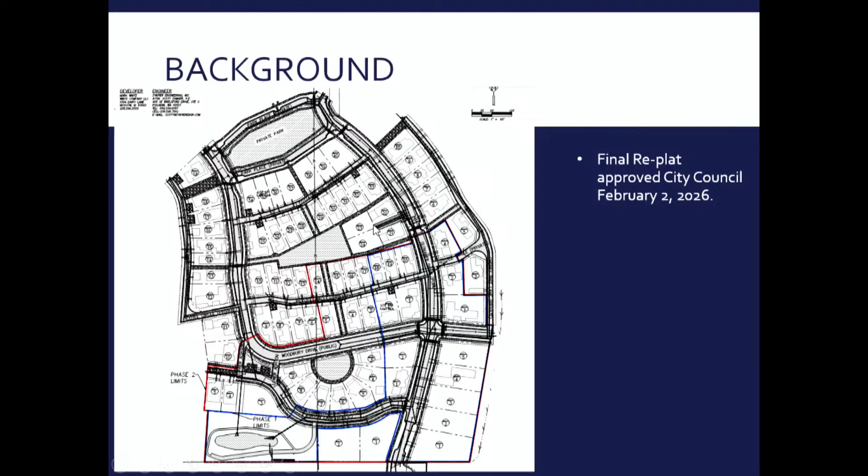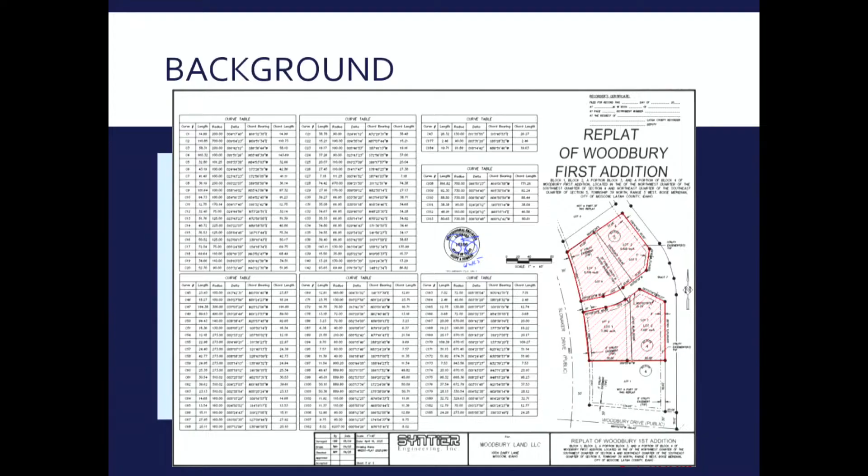For anybody who isn't familiar, this is the location of the Woodbury development. This is the previous plat. Particularly pay attention to this area here and this area here. I'm going to try to go fast. These are all the areas where the replat took place. Like I said, everybody has already seen that before.

So what the amendment did for the development agreement was address the issue of the concrete paver sidewalk. City council approved it on the condition that the pavers were set in concrete, and that the paver maintenance - the HOA of the development entered into an agreement with the city saying that the HOA would assume maintenance of the concrete paver sidewalks. So the development agreement has been amended to reflect those conditions. Also, with the change in the property lines, the phasing plan changed, so we changed the development agreement to reflect those changes.

The monumentation agreement - the number of property lines, number of pins, all that stuff changed, so the estimated cost to do the development changed. I do need to point out there was a mix up in the monumentation agreement - the estimate for the PLS got put in as the security amount and not the cost amount. So we do need to revise that monumentation to fix some of those changes.

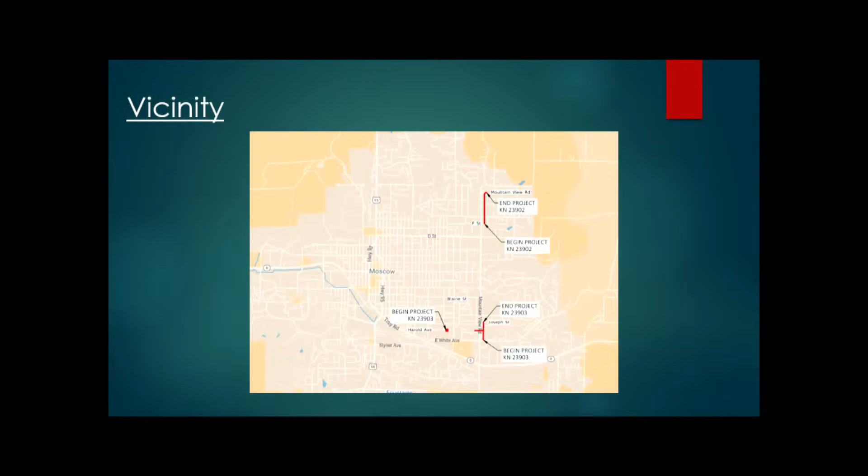So the history on this one, this is a TAP fund that we had applied for back in 2022. At the time, they still had some leftover COVID money, so they were encouraging everybody to actually apply for two projects. So we were awarded two projects, and we were able to secure both the north and south versions of Mountain View on this one.

As he was showing you, the north segment is doing about 1,600 feet of new curb and gutter and sidewalk on just the west side of Mountain View. The east side had been previously taken care of by the development doing the offsite improvements there. Then the southern segment is about 900 feet of curb, gutter, and sidewalk, going from Joseph to the bridge, hitting both sides of Mountain View.

The other additional enhancements part of this include a new pedestrian warning beacon, one of the rapid flash beacons up there at Paradise Path crossing. We'll be doing the gap of sidewalk on the north side of Latah County Fairgrounds where it's missing. And then doing some intersection improvements over on Blaine and Harold, basically a bulb out to help with sight distance for everybody trying to take a left right out of there on the side street by the armory.

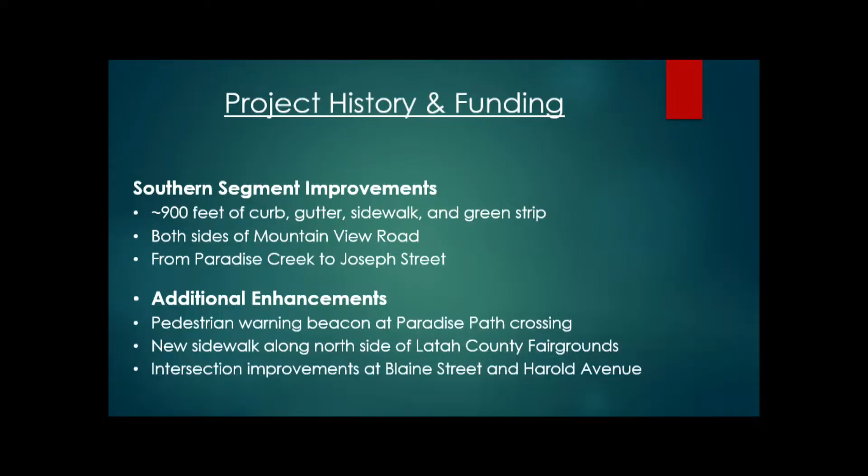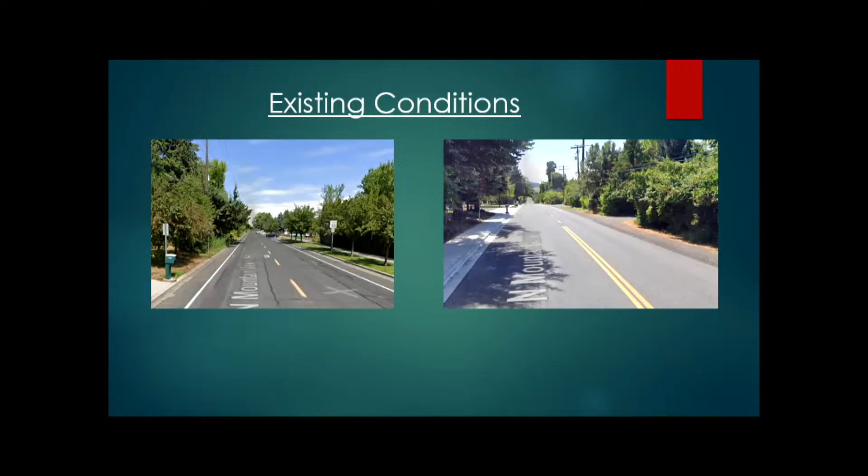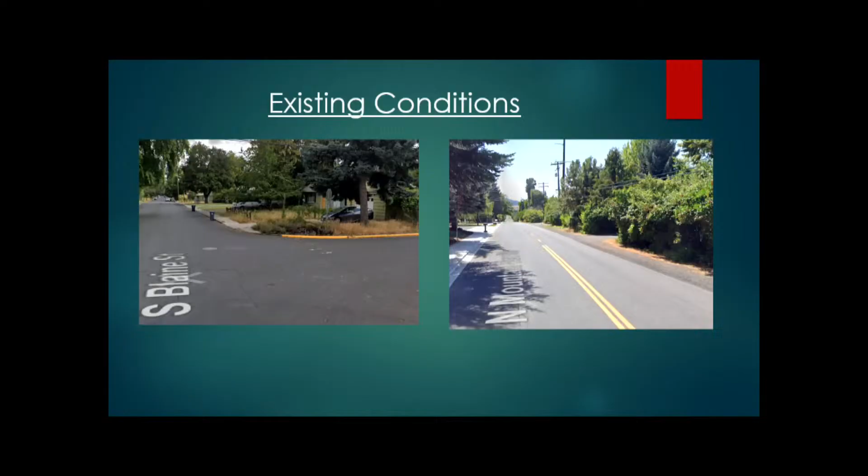This picture on the left is Blaine and Harold, that's the bulb out Scott was just talking about, to improve intersection geometry through there. The picture on the right is Mountain View, more on the north end of this project, where there isn't currently sidewalk. And then this is what it's going to look like. Do I have to press anything? Yeah, you should just hit the button. Okay, so this is the south one. Fancy, I like it.

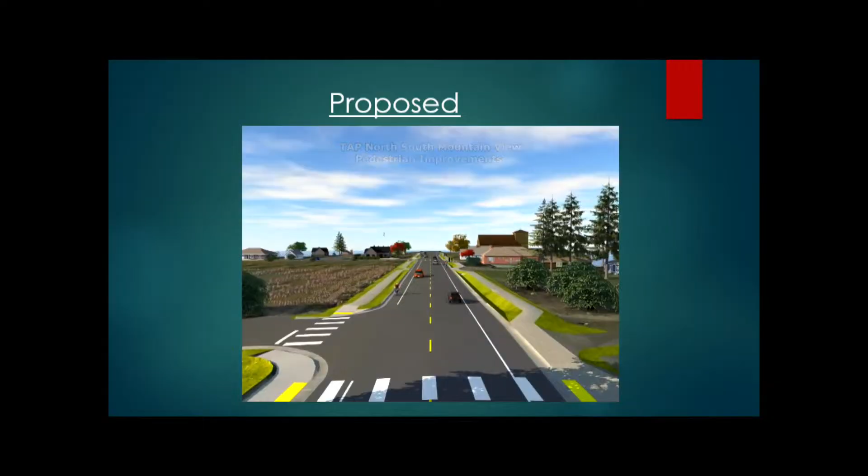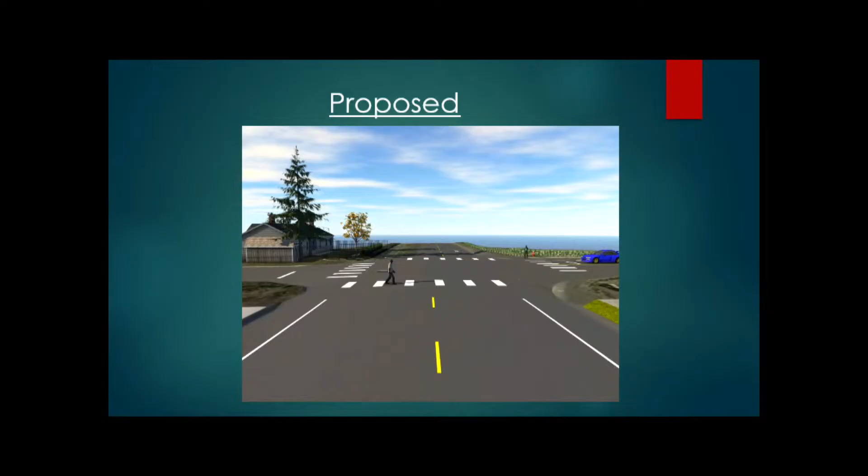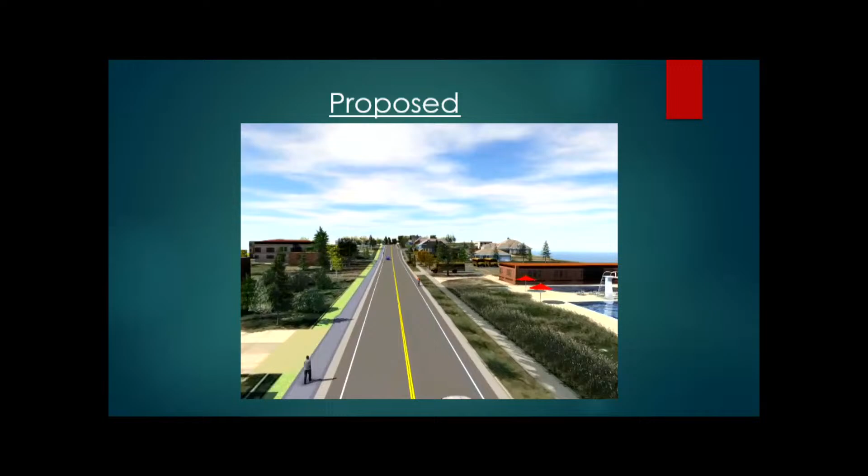So curb, gutter, sidewalk, minor storm improvements in that area. And then this is the north end, starting from the pool heading north, all on the west side of the road up there. This will be curb-adjacent sidewalk on the west side, fitting within the right of way.

Who did the renderings on those? We did.

Cool. So the construction bid results: City of Moscow advertised February 10th of this year, and we opened bids March 3rd of this year. Bids ranged from $1,025,088.98 to $2,285,746.76. The engineer's estimate was $1,276,956.50. Lowest responsive bid was from La Riviere at a little over $1 million.

Staff recommends acceptance of the low bid from La Riviere, awarding the contract for the base bid in the amount of $1,025,088.98, and authorizing staff approval of construction change orders not to exceed 10% of the contract amount, or provide staff further direction.

Any questions? Have you worked with La Riviere on city projects before? Yeah, we worked with them on that East Street rebuild up there by Russell Elementary a couple years back.

I'm curious about the timeline on this project. It cannot start earlier than May 18th.

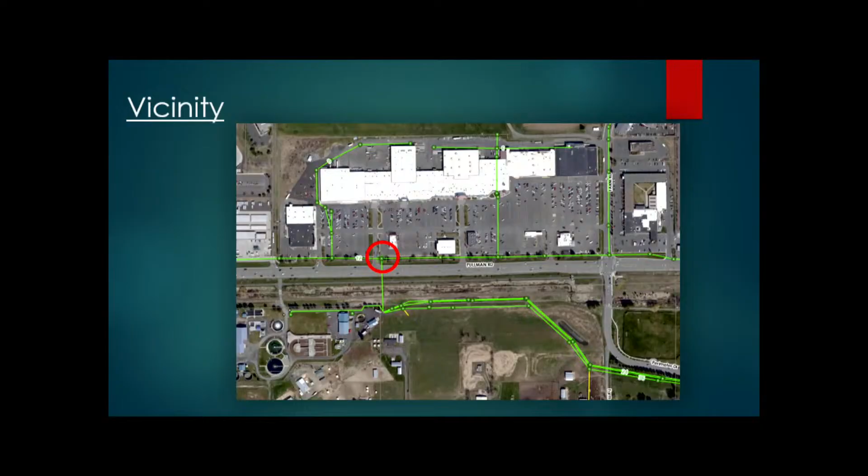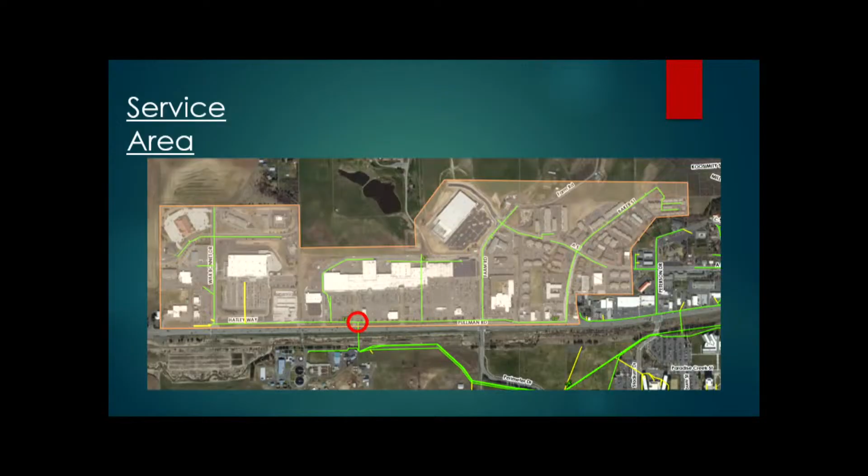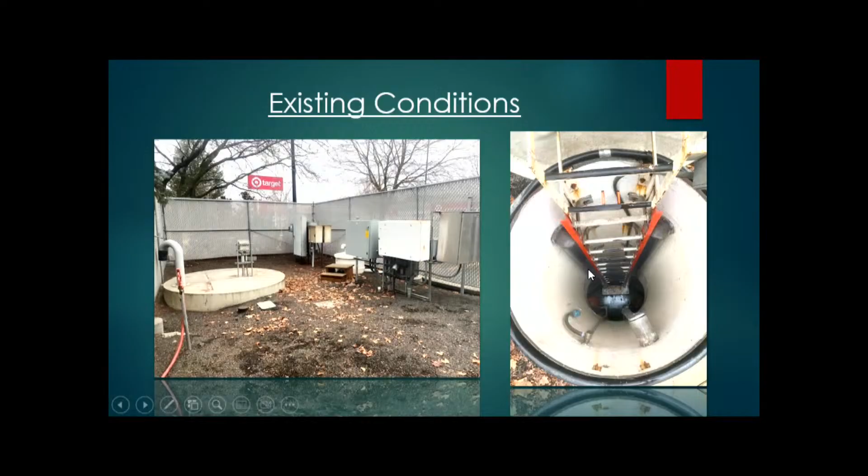The vicinity of this, the Palouse Mall Lift Station, is just southwest of the new Chick-fil-A. It picks up roughly 190 acres of drainage for the sewer system. That station sees roughly 6 to 8% of the flow that comes into the facility, and pumps that over to the treatment process. The existing conditions: we currently have a wet well and a dry well, which is that station — this pit here that we're looking down into. It's a flooded suction pump station right now from the 1970s.

It was originally constructed in 76. It had electrical upgrades in 97 and in 2020, just to address the aging panel out there. It had wet well modifications in 2009 to put a larger barrel on the upper section to handle increased flows. And it currently pumps sewage up approximately 23 feet in elevation over a distance of 354 feet.

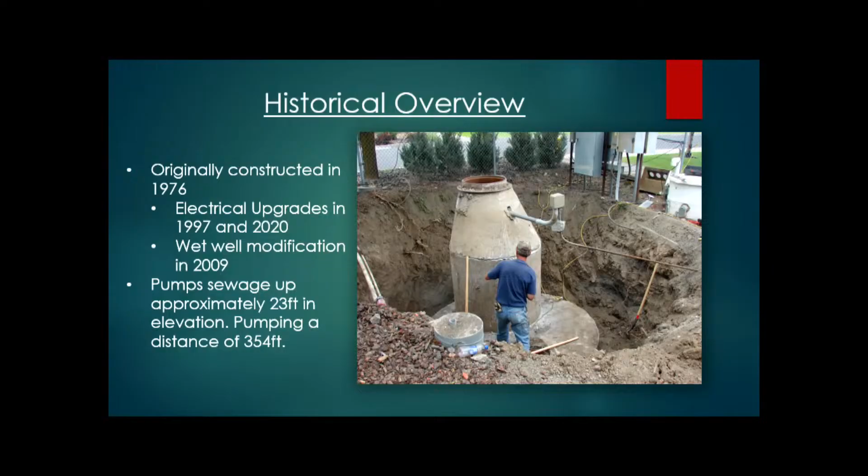The design of it, we would be rehabilitating the existing wet well. It meets the 50-year capacity outlook that we're looking at for that station. It was determined based off the minimum and maximum amount of pump starts that we could handle out there. It would eliminate the dry well pump station, installation of 2 submersible pumps.

There would be a new electrical system and control systems out there, a new valve vault, flow meter, bypass vault to ensure that we can bypass the area. And then also installation of a new 16-inch force main to help us meet 2075 future flow projections.

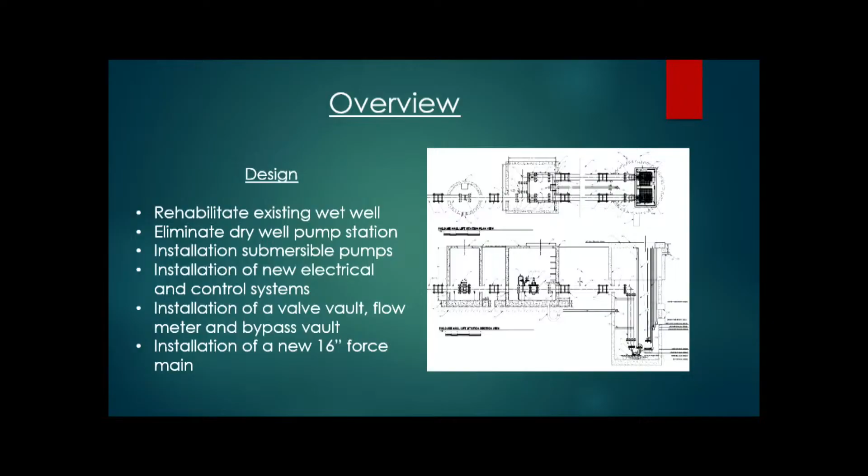You can see also the valve vault and flow meter would be outside of the existing station's footprint, just to the south of those. That's really space-wise all we can work with. It's such a tight lift station footprint currently.

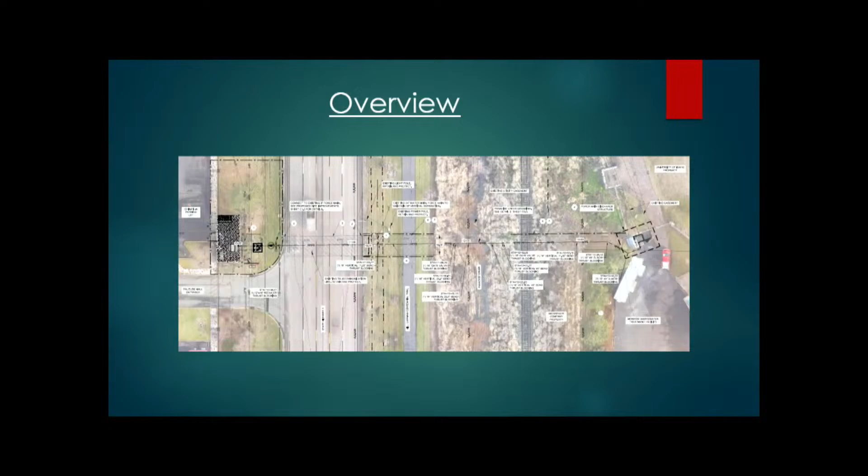With that, bid opening results that we got. We had advertised the bids back in January. This project had a little more time for the contractors to look everything over. We did get 5 bids back. Bids were open on March 3rd with bids ranging around 1.2 million to 1.9 million.

Engineer's estimate on this was 2.1 million. From what I've heard from our engineer on this, Ardurra, they've had a few other bid openings recently where their estimate also had some contingency in it, knowing what prices were happening in the past few years. Apparently the bids have been really great on this type of work recently, so things have been a lot better than expected.

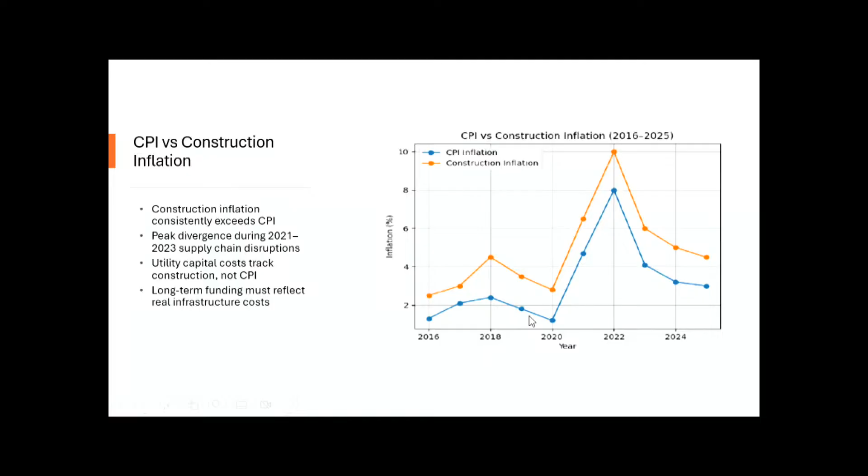But the point is that we're always combating this, which has historically been the case forever: construction inflation always outpaces standard inflation.

So I'm going to get into the key components here of each utility, and I've got the utility managers here. Steve Schulte, the storm utility manager, unfortunately is out ill today, so I'll cover his section. But I'm going to let Justin run through some of the specifics for the water utility, what's driving the rates and what he's seeing with water.

Thanks, Tanner. Good afternoon. So what we've got out of this so far is that there's no structural changes in water. All the base rates, everything's going to stay the same, so we're good on that.

But some of the driving factors are the aging water infrastructure we have. We have over 6,500 connections and 100 miles of pipe, and it's all outdated, a lot of it in the center of town, so that's driving costs up a lot. Ongoing upkeep is necessary to maintain reliable and safe drinking water, and major capital investments are required to address long-term system needs. There's $13.6 million allocated in the CIP from 2025 until 2031.

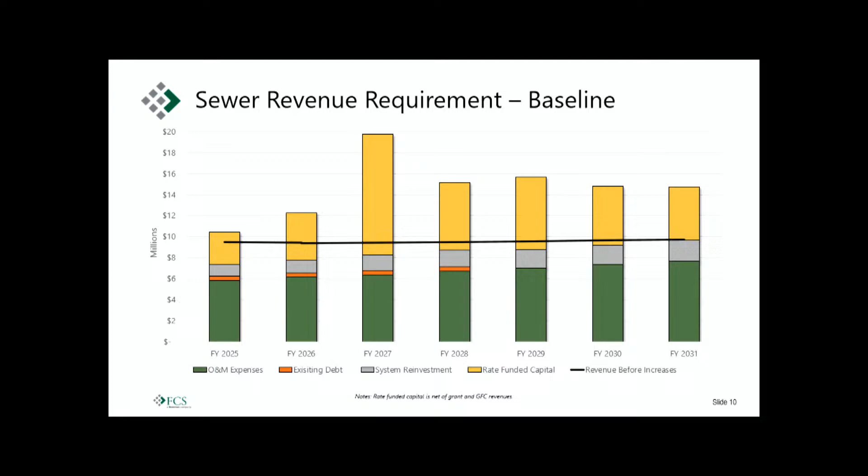Any questions on what the sewer rollout would look like? Would that be communicated on the water bills, or would there be sewer bills communication?

We'll have a whole communication and outreach plan that we'll put together for that. That's likely to include direct outreach, postcards in the water bills. That communication will go out, also as an opportunity for us to promote conservation. That's one of the reasons for the delays - we want to get communication out about ways people can have a positive impact on their own bill, giving them time to change out fixtures or adjust landscaping to prepare for this.

Yeah, I mean, as presented today, I'm excited about what that could potentially look like for many reasons, especially adding on to the work that Kelly and her team have also been doing. Casting a wide net there for long-term goals in a lot of different ways, I think is great. So yeah, excited to see how that progresses.

Great. Yeah, thanks, Evan. With that, we'll move on to the storm utility.

So the stormwater utility is our newest utility. It's our smallest utility - we have 3 full-time staff members in storm, a supervisor and 2 operators. The storm utility was formed after we received an MS4 permit, a municipal stormwater permit under the NPDES guidelines from the federal government.

That's now being administered by the state of Idaho - they pursued and were granted primacy. We finished that first term, and as we established the stormwater utility, the initial stormwater study for the formation of the utility was premised on doing an inventory, because really we just didn't know what we had out there. The maintenance of that system has been reactive from the time it was installed. We have pipes that have been in the ground for 100 years that nobody's looked at. If they haven't physically backed up, nothing's happened with them.

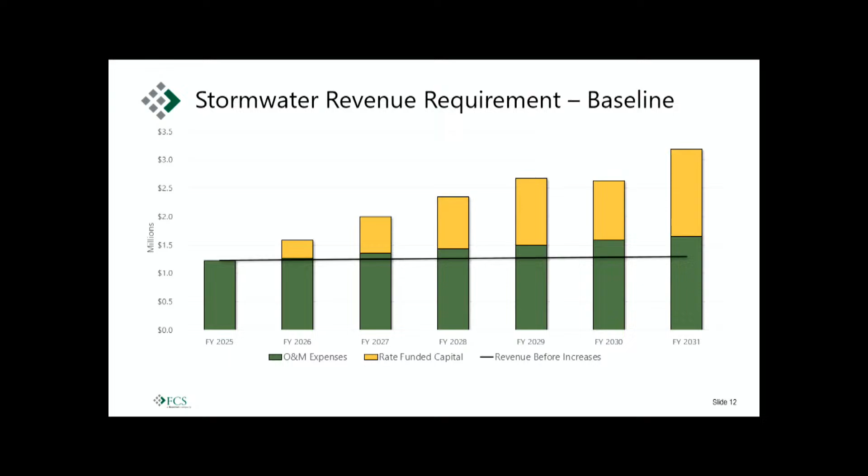So I'm going to move through these relatively quickly because we will go through these in a lot more detail at the council meeting. But this is kind of just a reiteration of what the revenue requirement is and what it's constituted of.

We've got to fund O&M, we've got to fund capital and any debt. And to get on to this, here's what's being proposed.

In order to meet the obligations we're showing here, we would have a 5.15% increase starting in FY27 for water, going out through the term of this study. Sewer would have a 2.8% increase from FY27 through FY31.